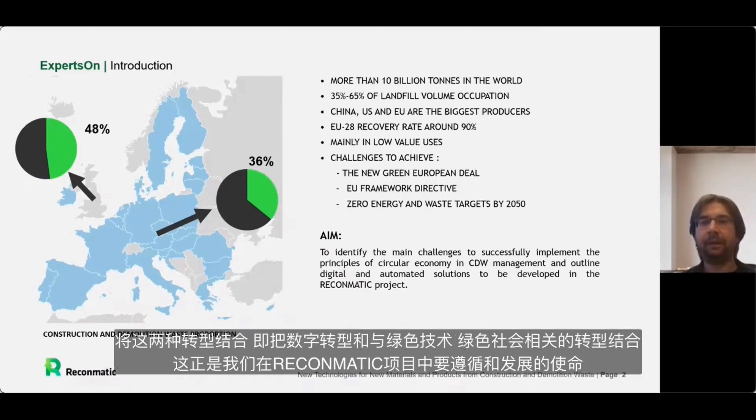The other challenge we face today is the transition from the industry and life as we know it, as we've lived for the last decades, to a more digital and hopefully smarter and more efficient society. Combining these two transitions - the digital one and the one related to green technologies and green society - is exactly the mission we are trying to follow and develop within the RECONMATIC project, which brings together the principles of circular economy and more efficient construction and demolition waste management, following the needed focus on the whole life cycle of structures and buildings.

That's the main figure which we set in our proposal, which shall explain the vision and objectives we are following in RECONMATIC.

I hope most of you will agree that the waste problem, and the potential of reusing, recycling, or even avoiding waste, is applicable to all stages of a building's life, starting with the planning and designing of a structure, where stakeholders like investors or designers can reduce or increase the portion of waste just by making the right decisions about what has to be planned, what kind of materials to use, and how we are going to build the structure.

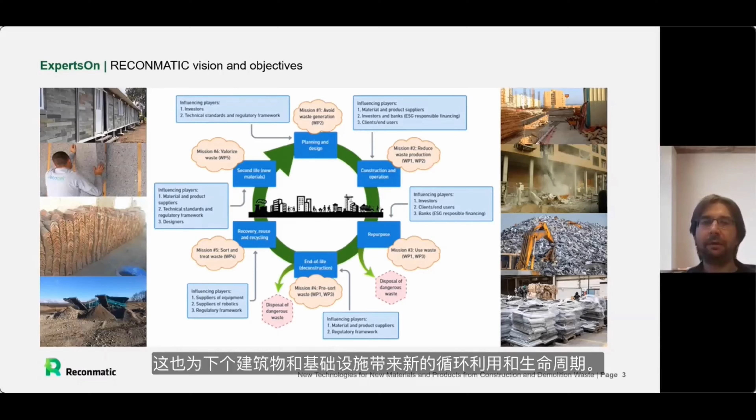What we are looking for, and what is the mission of RECONMATIC, is to seek new solutions and technologies, even in combination with automation processes and robotics, to better sort and treat the waste material, so you can valorize the waste material and create a new cycle with higher economic and technical added value for material which was once used in the building, going again into a new cycle and new life for the next structure, building, or infrastructure.

This is also why we think we can effectively integrate different digital solutions or automation solutions now existing on the market, starting with building information modeling. We're defining and incorporating better data and information about a building, which can help from the design stage until the operation stage to understand what kind of materials and properties we have, and how we have to deal with these materials or construction products through the whole life cycle.

Similarly, if we're speaking about artificial intelligence, blockchain, Internet of Things, etc., these are digital solutions which can be transferred to new applications that help optimize or reduce the waste going to landfills. As an example, with artificial intelligence, we train the equipment with machine learning solutions, so we can better sort mixed construction or demolition waste, getting material streams that are less contaminated. With less contaminated material, you can create much better technical solutions for how it can be reused.

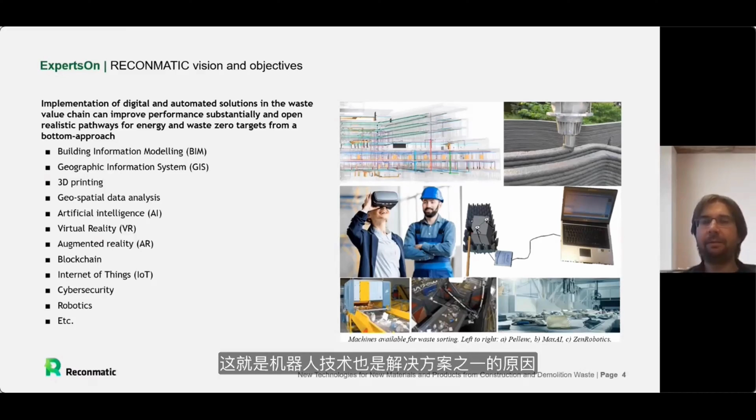Robotics is related mainly to solutions where we're looking for faster, more precise methods, avoiding the need for manual work when waste material has to be sorted. For many regions right now this might be a more expensive solution, but in the near future it will be preferred, because if you go to recycling yards or companies and see the environment manual workers have to work in, a robot that doesn't care about dust and harmful environments will deal with the material in the same way, or even more effectively, than a manual worker.

I already mentioned we are following 6 different missions, defined by what we can do with the waste. We can avoid the waste — especially when planning our buildings or starting construction, by doing the planning or design a bit differently, understanding and integrating life cycle assessments of materials into regular decision processes, to help designers and investors make the right choices and avoid excessive waste created by unoptimized building design.

Then we have the minimization of waste, often related to the construction process, where we can seek techniques or technologies, and even the processing of these technologies, so that when constructing gypsum board partition walls, you plan before placement to avoid having 30% waste by cutting the boards, reaching maybe only 10% or even 0% waste.

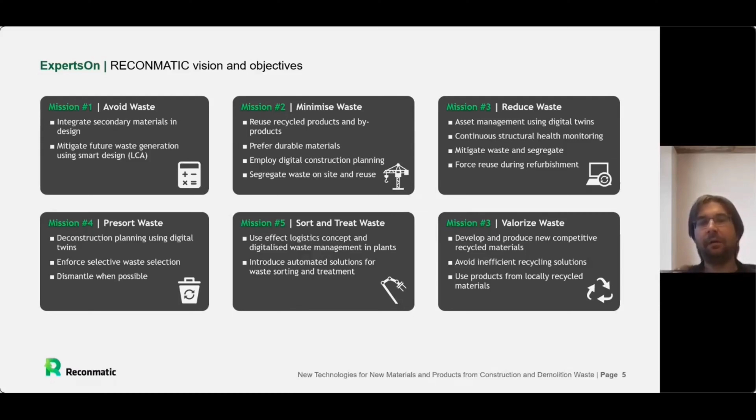We can much better plan in advance how to reduce the waste occurring by these activities. Sorting, treating, and pre-sorting is a huge area and a very important mission we are going to follow, because there is still a question of whether it is better, for example during demolition of a building, to do pre-sorting on site, or if there are limitations meaning we have to think in terms of logistics and solutions to do the sorting at recycling yards, some centers where we will then treat and sort the materials to get particular streams of materials.

Like ceramics, glass, plastics, wood, etc., so that later on, in the last mission, we are able to better valorize these waste streams, meaning we are not simply looking at downcycling, which we are always able to do, similarly to incineration of many waste streams, but we are more focusing on getting efficient solutions of reuse and recycling, so that the added value of the waste material is higher than just downcycling.

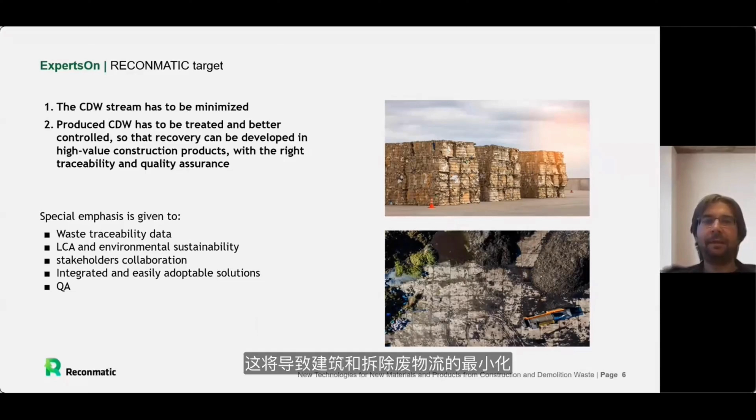The target in this respect is very simple for RECONMATIC: to have procedures, methodologies, and to demonstrate some solutions which will lead to minimization of construction and demolition waste streams. And on the other hand, to have a clear line which will guide us to solutions providing new products.

Products of materials and parts of structures and buildings which will have higher value, without the fear that there will be limited quality issues, or reduced bearing capacity of these materials.

In this respect, what we definitely are looking for is the way how we can better get or provide traceability of data related to the waste streams which we have on a building or structure.

Then, of course, which is very important, is to integrate, as an integral part of each structural material or construction product, the sustainability aspects and the LCAs, so that as civil engineers we are not only understanding structures in terms of technical parameters, but starting much more to reflect also the environmental sustainability.

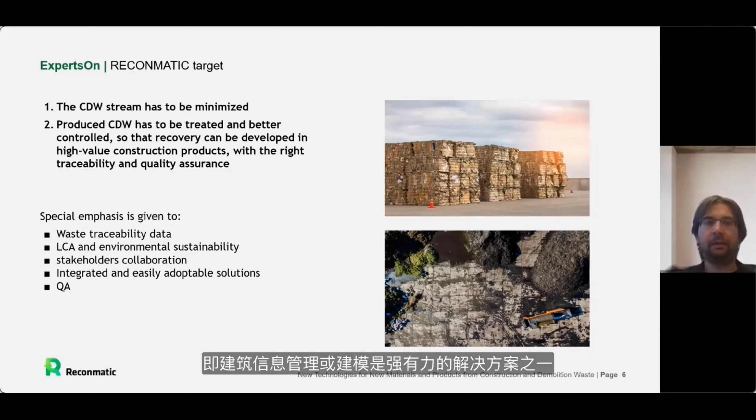This will all work only if we are able to get better and more effective collaboration of different stakeholders. And it is believed, not only by the RECONMATIC team, that building information management or modeling is one of the strong solutions for how we can reach this.

Where we are looking for delivering a digital information management system which will merge all these stakeholders together, support collaboration, and provide waste data from the very beginning until the stage of valorization of waste materials and waste streams.

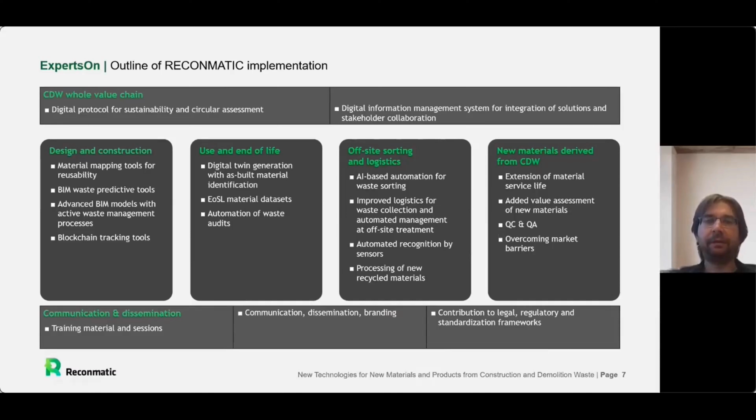Being integrated in the regular BIM tools and BIM solutions we already have, and at the same time the blockchain tracking tool, which we will start maybe with concrete, since concrete is one of the most important materials. So we believe it makes sense to have some solution and demonstration for this type of material.

Similarly important is the end of life, where what is missed right now are the digital twins of existing buildings. If we would have them and know how to get them quickly and efficiently, we can during operation, and especially at this stage when we are planning our demolitions, make these decisions more effectively. Then I already mentioned the sorting and logistics.

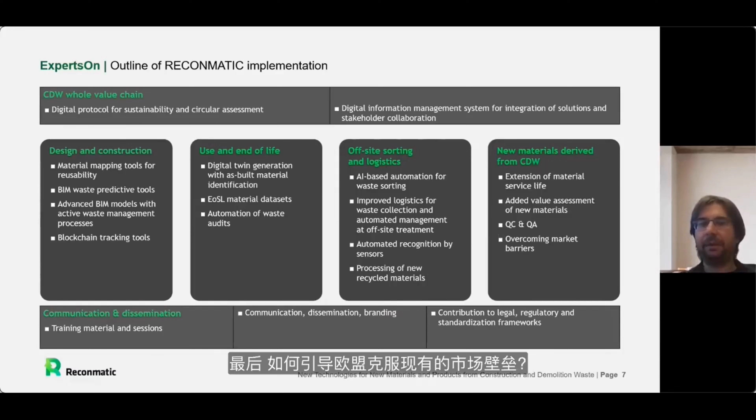We will deal with some quality assurance and quality control mechanisms, how we can digitalize this, including the digitalization of pre-demolition audits, etc. And finally, how to guide the European Union in overcoming the existing market barriers.

This is just for your information. What are the partners involved in the whole project? You can see that in total we have 23 partners. In Europe, we are planning to have 6 demonstration cases, so a real demonstration of the new solutions.

That's what was even asked by the European Commission. You can see the countries which are involved, so the coordination being in the heart of Europe, and then we are more or less covering different parts of Europe, with UK, Spain, Italy, Greece, and Cyprus.

And as area which is on the other side of the globe, where you are now listening to my presentation, is the People's Republic of China, which is the last region involved in this project.

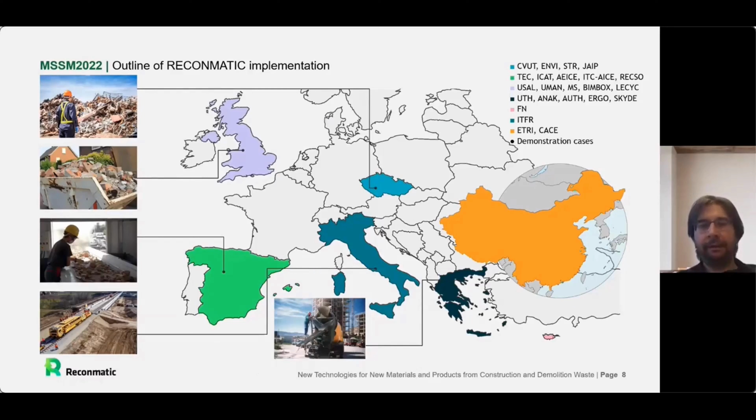The outcomes and impacts we hope to reach. The first outcome is to simply get and introduce new knowledge in reusing, dismantling, and a better valorization of construction demolition waste. We have set some KPI with increasing by 50% the reusability of construction products by the solutions we will deliver.

There should be also some advice and recommendation to the European Commission on new or updated standards which will be needed, especially if you are combining the technical aspects and the aspects of environmental sustainability. This will simply lead to the need for new or advanced standards.

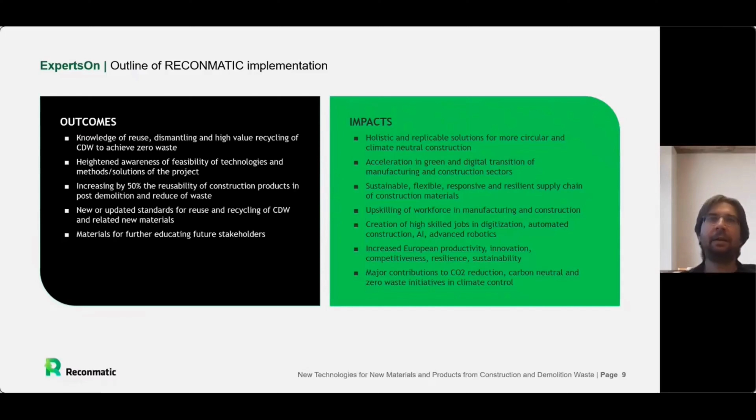And we will create even some education tools and materials. There will be some training for different stakeholders and systems, activities like train-your-trainers, so that we are not only delivering the solutions and new innovations, but we are also preparing how these solutions can be effectively used by the industry and by society.

And the impact is, let's say, quite simple. We would like to contribute to the need for reducing energy needs and CO2 emissions, support the overall target of carbon neutrality and becoming a nearly zero-waste society.

We would like to reach construction materials which are sustainable because of valorizing the waste materials which are less contaminated, and these materials shall be even resilient and more durable, so that this all makes sense.

This shall also create new potentials in jobs for the future, since the whole area of digitalization is a challenge for creating completely new jobs, which will require, of course, a different kind of skilled workers.